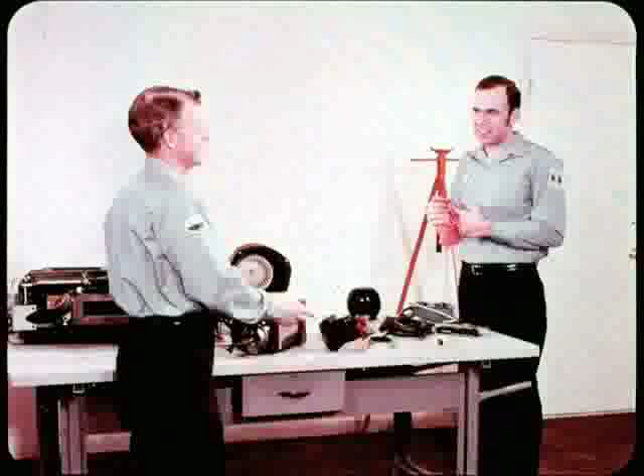Hi Phil, I see you're getting ready for the tech meeting on the new Auto Temp system. I hear it really performs. That's right, Jack. It's a second-generation system that maintains very precise control and is exceptionally stable in operation.

What's it like for servicing? Lots of new things to learn? Not really. The previous one-piece control unit is replaced by a new servo assembly in the engine compartment and a separate amplifier inside the car. Also, a couple of units are eliminated. Most of the other parts work about the same as in the previous automatic system.

Well, that sounds encouraging. What's the story on the servo assembly? Well, for one thing, it's powered by an electric motor drive, which is designed to move the servo blower and vacuum switches slowly. This slow movement stabilizes the operation of the system by preventing abrupt changes in system output.

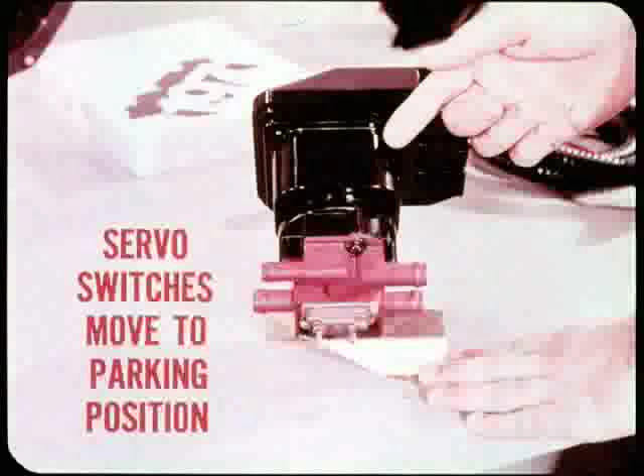In addition, the blower and vacuum switches in the servo automatically move to a parking position when the off button is pushed or the ignition is switched off. With this arrangement, the blower starts at a low speed to prevent an unwanted blast of air from the outlets. And the amplifier controls the servo.

This sounds like a discussion that should be real interesting to all of our master technicians. Why don't you start over and give Auto Temp 2 the full treatment from the beginning? Okay, Jack, but stay around. We'll probably need some help.

I understand that the heating, cooling, and air distribution sections of this system are practically the same as those used in our manual control air conditioning installation. Correct. And that means that anyone who understands the manual control system should have no trouble with those parts of the Auto Temp 2. Now let's see how the systems differ.

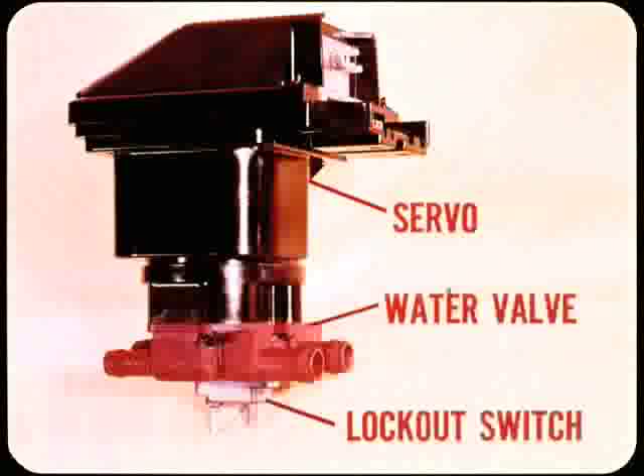In the heater section, flow through the core is controlled by a water valve, but the valve in Auto Temp 2 is operated by the servo. A new cold engine lockout switch on the water valve keeps the blower from operating in the heat mode until the engine coolant temperature reaches 125.

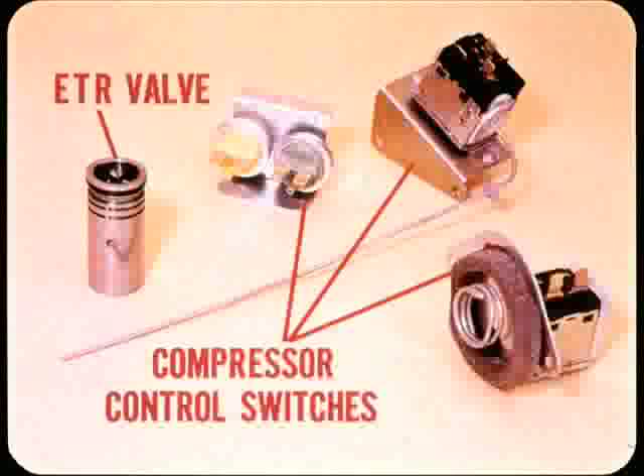The main difference in the refrigeration section is at the compressor, which has a solenoid-operated evaporator temperature regulator valve instead of the pressure-operated EPR valve. There are also 3 compressor control switches, which I'll cover later on.

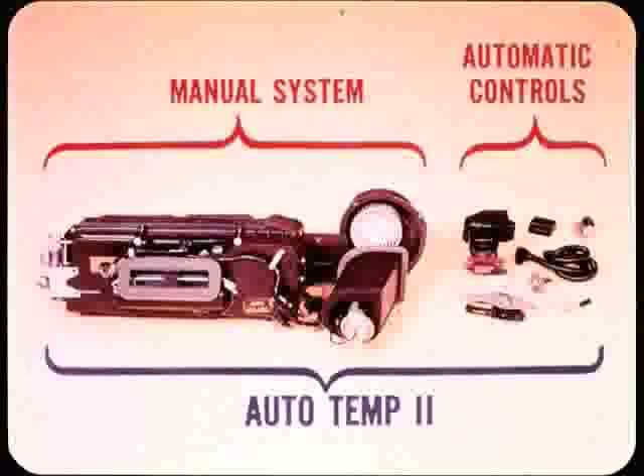As in the manual system, 2 vacuum actuators operate the heating, cooling, and defrosting doors. The separate air inlet assembly is also similar, except that the outside air door is controlled by a vacuum transfer switch. The main thing to understand at this point is that Auto Temp 2 is essentially our manual control air conditioning system with automatic controls added to keep output at a selected comfort level.

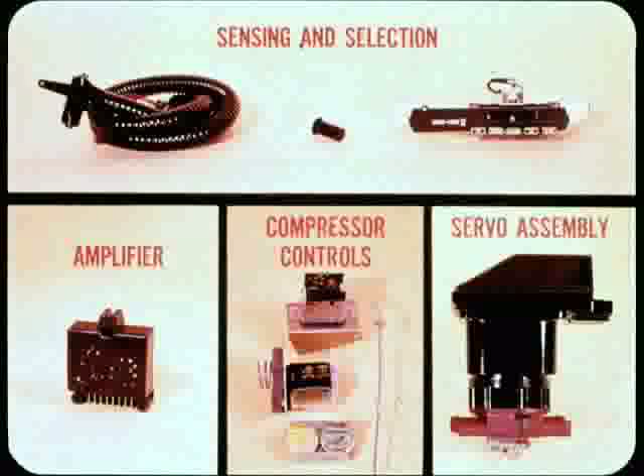Now tell us about the controls, Phil. For easier explanation, we can separate the automatic control system into 4 main sections: temperature sensing and selection, the amplifier, the compressor controls, and the servo assembly.

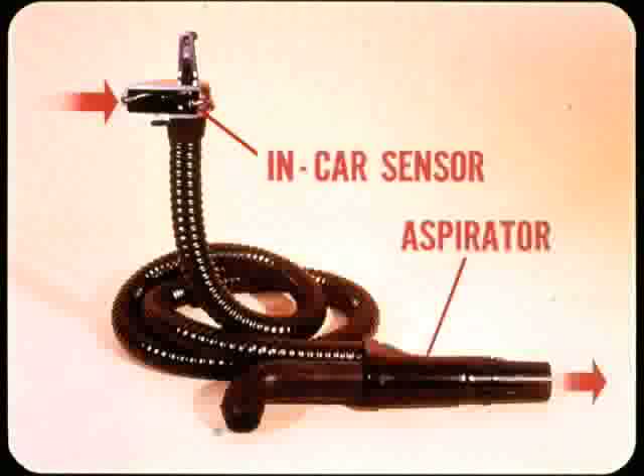The in-car sensor is affected by air temperature inside the car. It is located under a grill in the instrument panel where it is exposed to air drawn past it by the aspirator. The ambient sensor samples the temperature of the outside air.

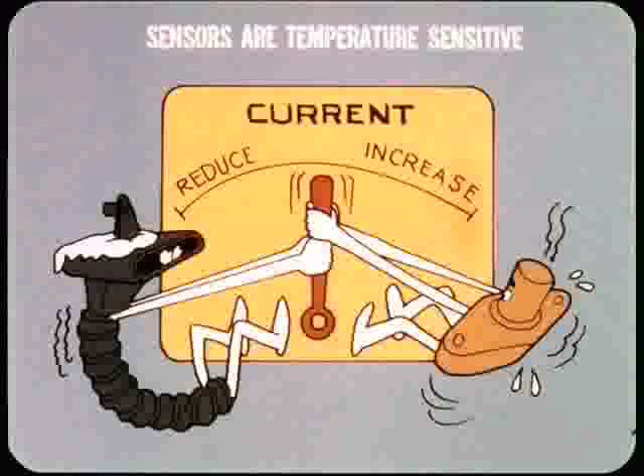It is mounted on the inside of the dash behind the glove compartment and extends into the air inlet chamber in the cowl area. Both sensors are temperature-sensitive resistance devices which reduce electrical current flow when they are cooled and increase the flow when they are warmed. Their resistance is high when the temperature is low and low when the temperature is high.

The temperature selector dial operates a variable resistance called a potentiometer, which works with the sensors and provides a manual setting for the desired comfort level in the car. When the temperature dial is moved toward the high side, the resistance increases. Toward the low side, resistance drops.

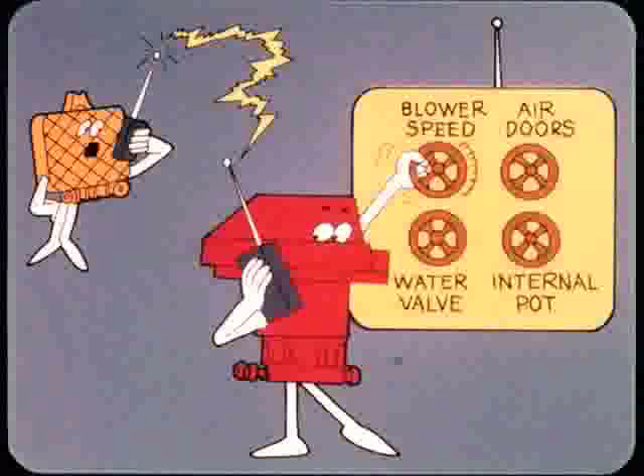The in-car sensor, ambient sensor, and control potentiometer are all connected in series. A resistance change anywhere along this line alters the current flow to the amplifier. When this happens, the amplifier signals the servo to vary the blower speed and, if necessary, to change the position of the air distribution doors and the water valve to provide and maintain the selected comfort level inside the car.

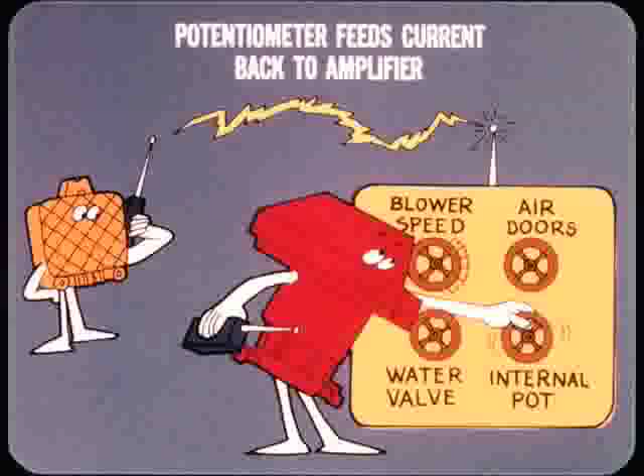As the servo operates, it turns an internal potentiometer which feeds current back to the amplifier. When the servo switches reach the position called for by the amplifier, the feedback cancels the input signals and the servo stops. How am I doing, Tech? Real good, Phil.

Why don't you backtrack and tell us some more about the amplifier? Okay, Tech. The amplifier is a solid-state computer device which combines the signals from the sensors and other system controls to direct the operation of the servo assembly. It is serviced by replacing the unit.

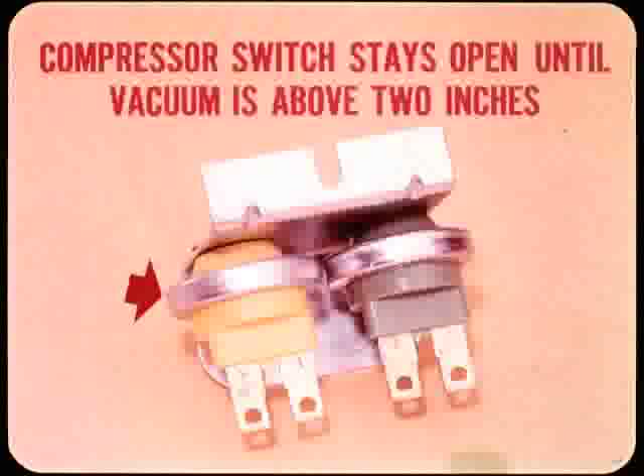You haven't said much about the compressor switch and the other compressor controls. Okay, Jack. First, we have the yellow-colored compressor switch, which stays open until system vacuum is above 2 inches. This prevents compressor clutch engagement when the off button is pushed in. I'll get to the green-colored blower switch farther on.

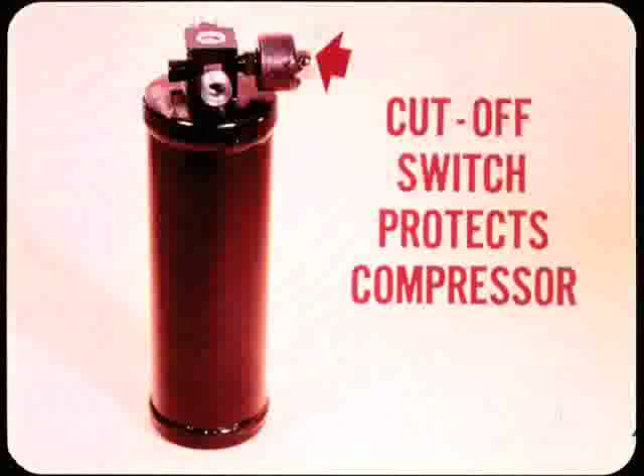Next, we have the compressor ambient switch, which has a capillary tube extending into the air distribution housing to sample outside air temperature. The ambient switch contacts open and prevent compressor clutch engagement when the outside temperature is below 32 degrees. Don't forget the low-pressure cutoff switch that protects the compressor if the refrigerant level in the system drops too low. This safety switch is the same as the one used in the manual control system.

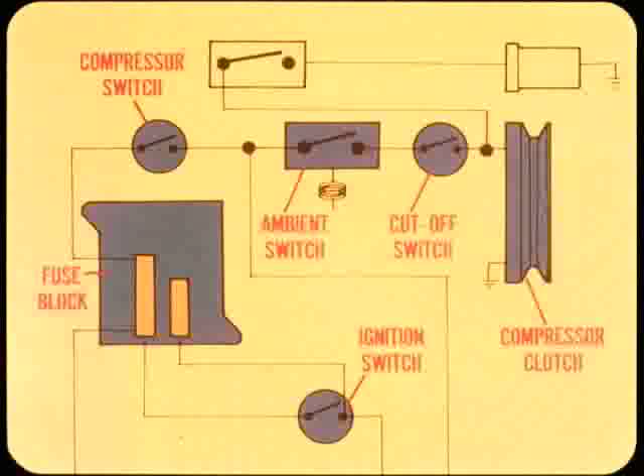Now, since all these switches are connected in series with the compressor clutch, the clutch does not engage when any or all of the switches are open. The clutch circuit is fed from the ignition switch through a 20-amp accessory fuse on the fuse block. The ETR switch is the final control unit in the compressor circuit.

This is a temperature-sensitive switch with a capillary tube that extends into the evaporator fins. When evaporator temperature goes below 38 degrees, the switch causes the ETR valve to block refrigerant flow, so the evaporator will not freeze up. When you check out the compressor circuit, you'll notice that all the other switches control current to the compressor clutch and the ETR switch. But this switch controls current only to the ETR valve.

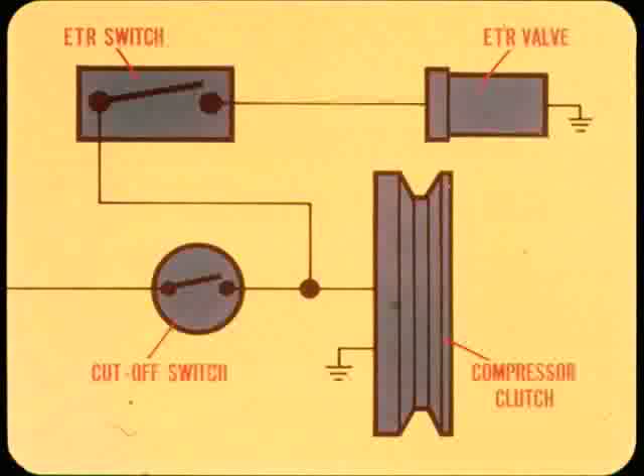This wraps up compressor controls and brings us back to the servo. We've already covered servo operation in general, so now we're ready for the servo blower switch and the blower circuit. But before we get into that, mark this down in big letters: do not tamper with the servo. The cold engine lockout switch can be replaced, but the upper section is off limits.

Okay, Phil, you're on. The servo blower switch is a limited rotation device with a switch arm driven by a two-way electric motor. The arm has an outer slider which contacts the blower switch segments. An inner slider maintains continuous contact, so the parking circuit can operate from any switch position.

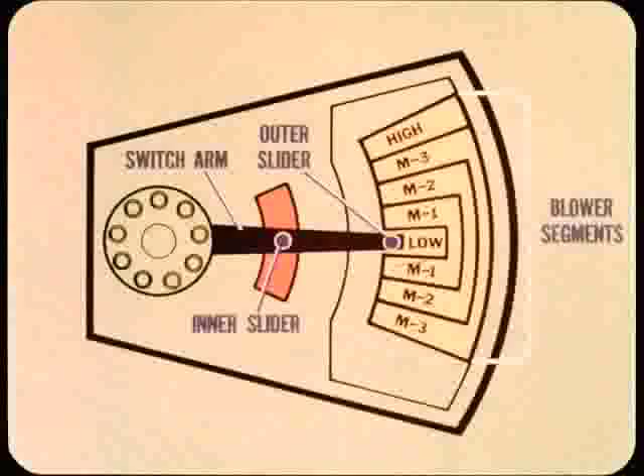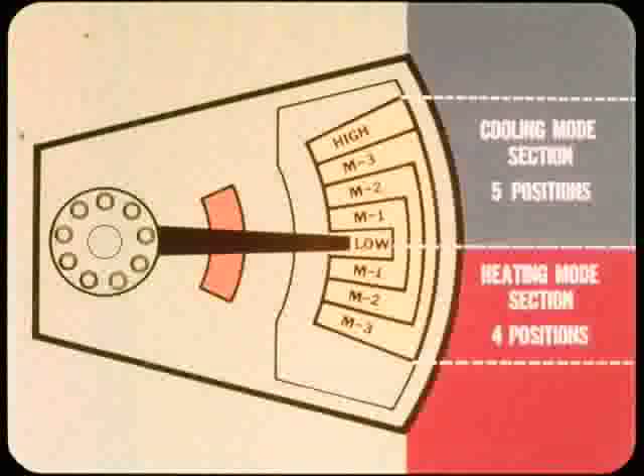The switch segments provide 5 speed positions in the cooling mode section: high, 3 intermediates, and low. In the heating mode section, there are 4 speed positions, which produce the same intermediate and low speeds used for the cooling mode. The blower switch segments connect to resistor coils on a block in the air distribution housing.

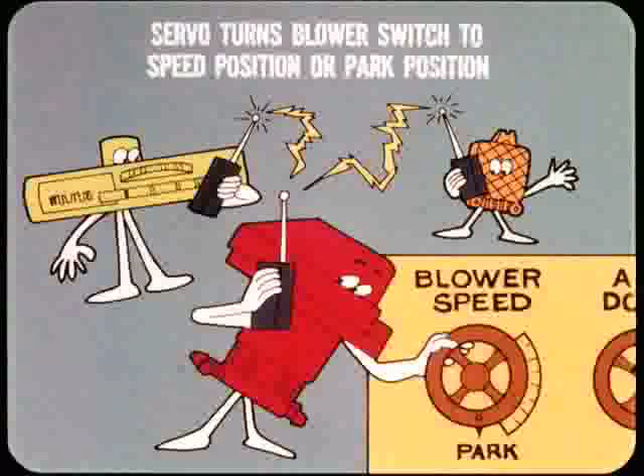The switch connects the resistors in series step by step to produce intermediate speeds. When the highest speed segment in the cooling section is contacted, the step resistors are bypassed to produce maximum blower speed. Now, depending on the push-button control setting and the amplifier signal, the servo turns the blower switch to one of the speed positions on the cooling or heating sections of the switch, or it moves the switch to the park position.

Now, I'm with you on the blower speed switching, but I need more on that park operation. Well, as I mentioned earlier, the servo parks when either the push-button control or the ignition switch is in the off position. The servo can park after the ignition is off because the amplifier has a separate fuse-protected parking feed, direct from the main fuse block.

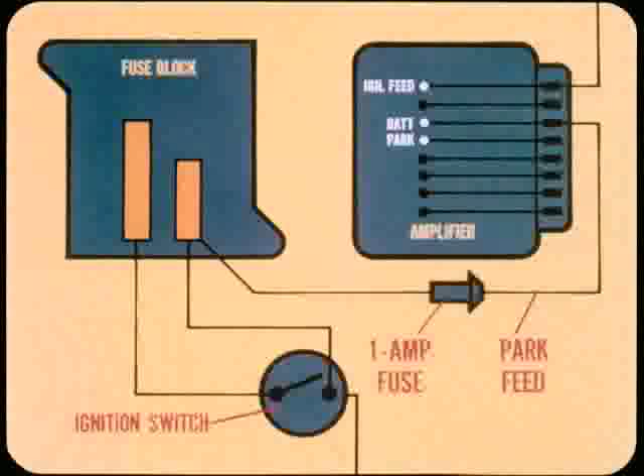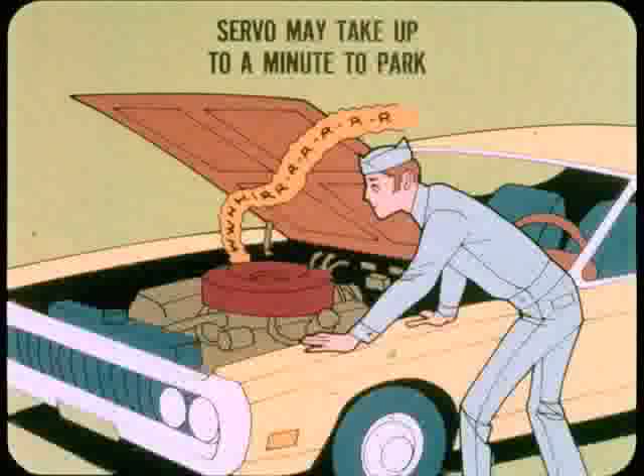You see, when all the other signals to the amplifier are shut off, only the parking feed remains. When this happens, the amplifier signals the servo, which moves to the park position and then shuts off. The servo switch arm parks on the cooling section's low intermediate speed segment. The servo switch moves slowly and may take up to a minute to reach the park position. So don't get worried if you hear the servo motor turning after you shut off the ignition.

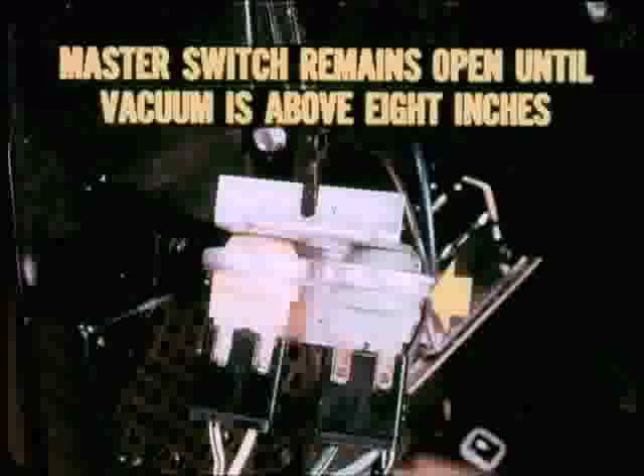Now, the blower circuit also includes the green-colored blower master switch. This switch remains open until system vacuum is above 8 inches and prevents blower operation when the off button is pushed. Okay, Phil, take a breather.

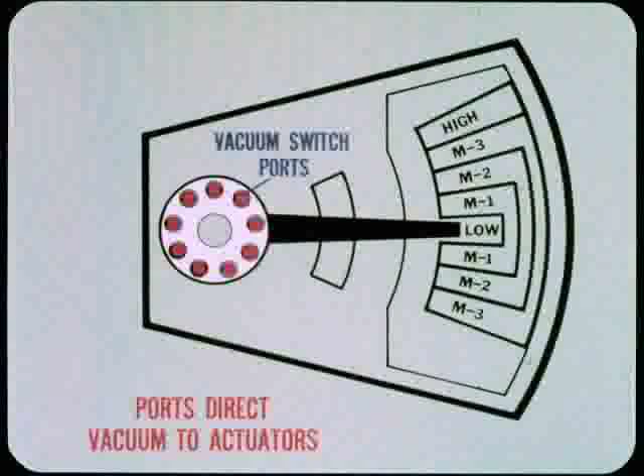The vacuum transfer switch is actually a sliding spool valve, which controls the open positions of the air inlet door, locking the door fully open or 20% open as called for by the amplifier. To hold the door closed, push-button control vacuum bypasses the switch and goes directly to the actuator.

The transfer switch has 3 ports, which are opened or closed by a sliding spool made of pliable material. An internal balancing spring holds the spool stem against the air inlet door so it can follow door movement.

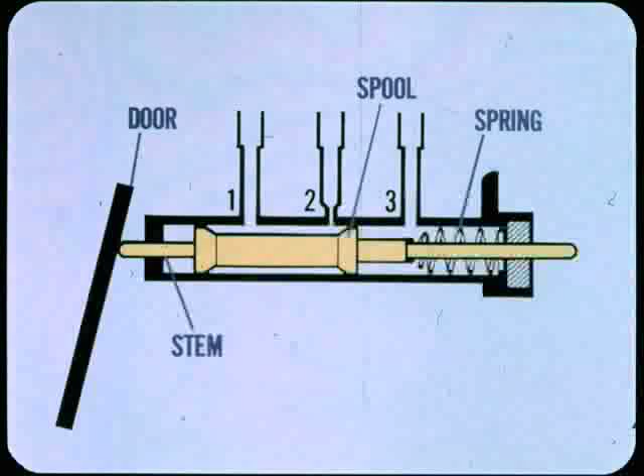Here's how it all works. Since the transfer switch is bypassed by direct vacuum routing when the air door is closed, there is no vacuum at any of the 3 transfer switch ports. The closed air door holds the transfer switch stem in and leaves the spool lips clear of the ports.

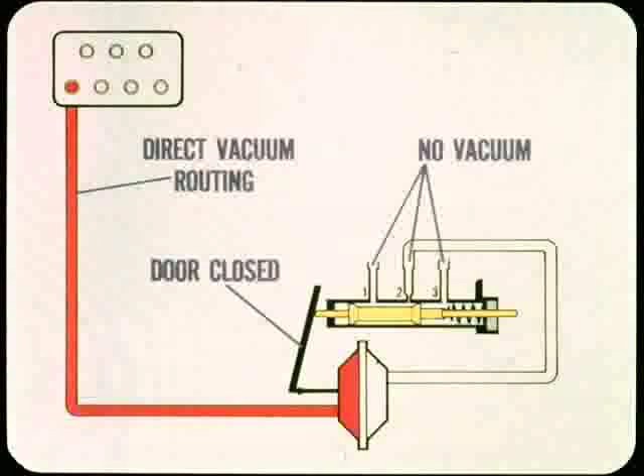In any operating mode, when vacuum from the servo switch is routed to port number 1 of the transfer switch, it acts on the closed side of the inlet door actuator through port number 2, so the door starts to open. As the air door opens, the spool follows the door until its inner lip closes the number 2 switch port. This sealing action stops door movement and traps vacuum in the actuator line to lock the door in the 20% open position.

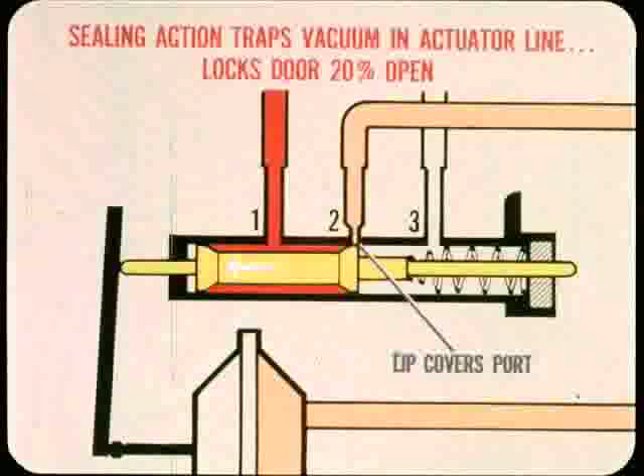When the amplifier signals for more outside air, servo switch vacuum is routed to the transfer switch. Servo vacuum is stronger than that trapped in the actuator line, so it breaks the lip seal at port number 2 and draws on the actuator to move the air door farther open.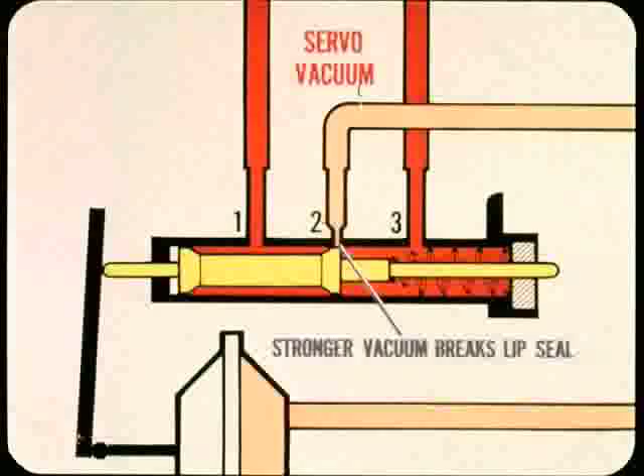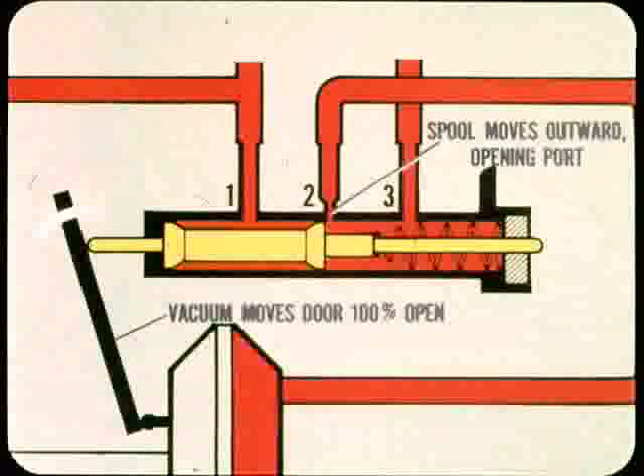As the actuator opens the air door from the 20% position, the transfer switch spool moves farther outward, fully opening the number 2 port to servo switch vacuum. This moves the air door 100% open and locks it in that position until the amplifier calls for a change.

As far as I can see, that just about covers everything in the vacuum system but the check valves and the vacuum reservoir. The check valves seal off sections of the vacuum circuits so the air doors and vacuum-operated switches can operate properly. The reservoir holds vacuum in the system for a period of time if the engine stalls or is shut off.

Don't forget to tell us how the cold engine lockout switch works, Phil. Okay, Tech. Well, basically, the lockout switch prevents cold air output when heat is wanted.

It is a simple bimetal strip which opens or closes a vacuum port in an airtight housing. The bimetal reacts to the temperature of coolant in the water valve. As I mentioned earlier, the lockout switch can be replaced separately without affecting the rest of the servo assembly. But if you need a new servo, replace it complete with a new lockout switch.

Okay, Phil? Now we can combine the operation of the electrical and vacuum circuits in a general roundup of what happens from the push-button end of the auto temp system. To put it all together, let's begin with a few general facts about system functions, so we'll know what to expect in normal operation.

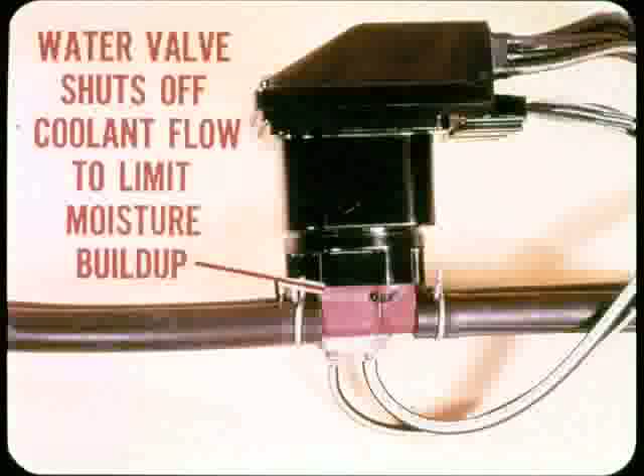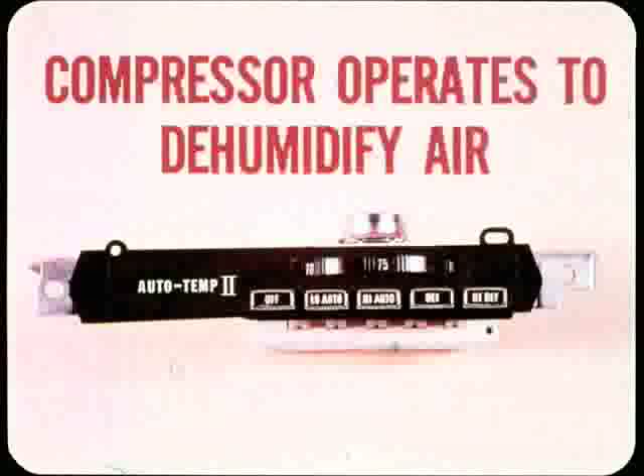When the servo parks, the water valve shuts off coolant flow through the heating core. This limits moisture buildup in the air passing through the system and into the car. In addition, the compressor operates on any push button but off, to dehumidify the air passing through the system. Of course, the ambient switch in the air housing prevents compressor operation if the outside temperature is below 32 degrees.

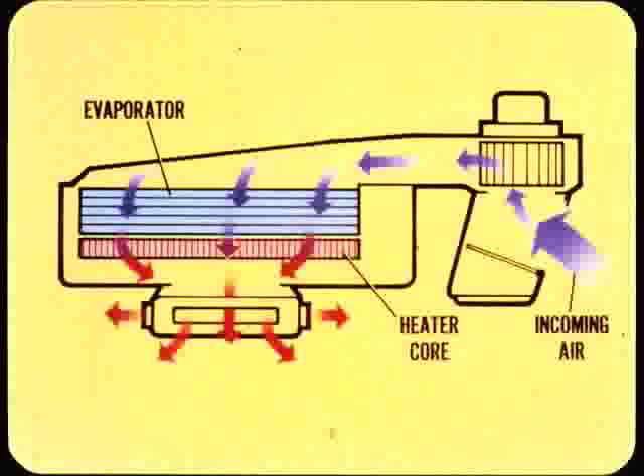So the cooling system operates even in the heating mode. That's right. The evaporator condenses excess moisture out of the incoming air before it reaches the heating core to help maintain an even comfort level in the car.

The higher blower speeds also get into the act when it's really hot and humid, especially in slow city traffic. The high air velocity keeps the car comfortable front and rear and pressurizes the car to clear out smoke.

Now, on to the push buttons, Phil. Pushing the off button parks the servo blower switch at the low intermediate speed position in the cooling section. However, the push button switch vents the vacuum lines to the master blower switch and the compressor switch, so the blower and compressor do not operate.

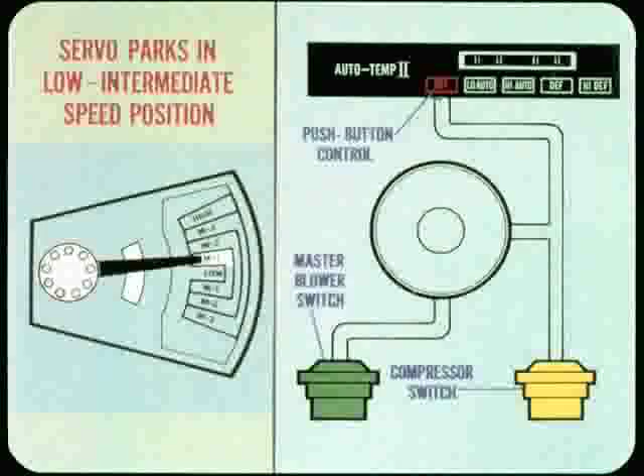On the off button, servo vacuum puts the air distribution doors in the cooling position, and spring tension holds the defroster door closed.

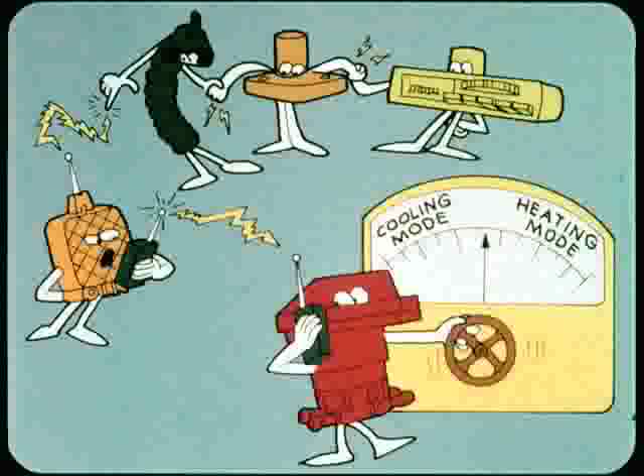Push-button vacuum goes direct to the actuator, bypassing the transfer switch to hold the air inlet door closed. With either auto button pushed in, the servo switches move to a cooling or heating mode position, depending on the signals the amplifier receives.

These signals come from the in-car sensor, the ambient sensor, and the selector dial potentiometer. In either mode, the compressor clutch engages immediately if the outside air temperature at the ambient switch is above 32. However, in the heating mode, the cold engine lockout switch delays blower operation until coolant temperature reaches 125.

On low auto in the cooling mode, the servo blower switch arm moves to one of the 5 cooling section speed segments, as directed by the amplifier. High auto bypasses the 2 lower speeds and increases the upper 3 slightly above the top blower speeds in low auto.

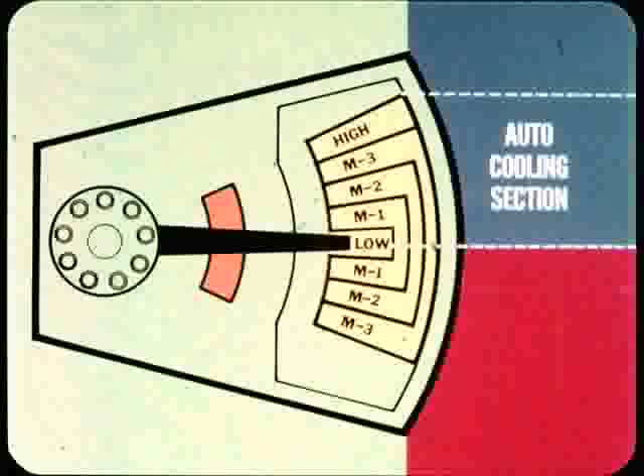On both auto settings in the cooling mode, the air distribution doors are in cooling position and the defroster door is closed, the same as when the off button is pushed. On either auto button, servo vacuum closes the master blower switch, the compressor switch, and also holds the air inlet door open.

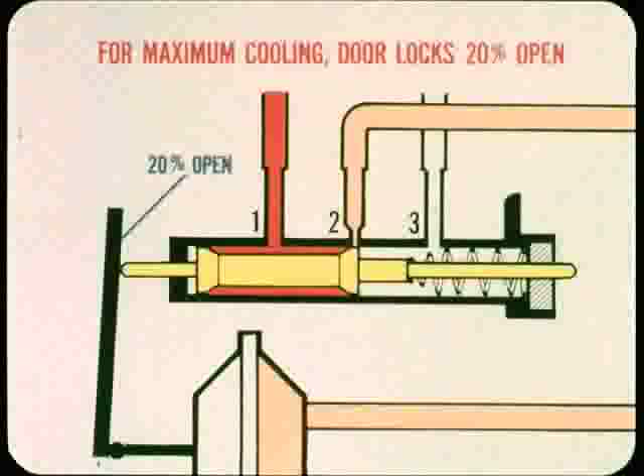Now, when the weather is hot and the amplifier calls for maximum cooling, the servo blower and vacuum switches operate mostly in their high-speed positions. This sends servo vacuum to the transfer switch, locking the inlet air door in the 20% open position. For average cooling operation, the servo switches work in their lower speed positions.

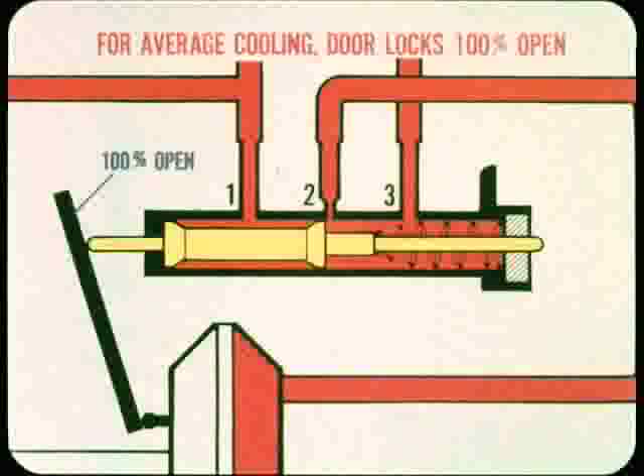This changes the servo vacuum switch port alignment and routes transfer switch vacuum so that the air inlet door locks 100% open. Now, on low auto in the heating mode, the servo blower switch arm moves to the heating section of the switch, where it contacts one of the 4 speed segments.

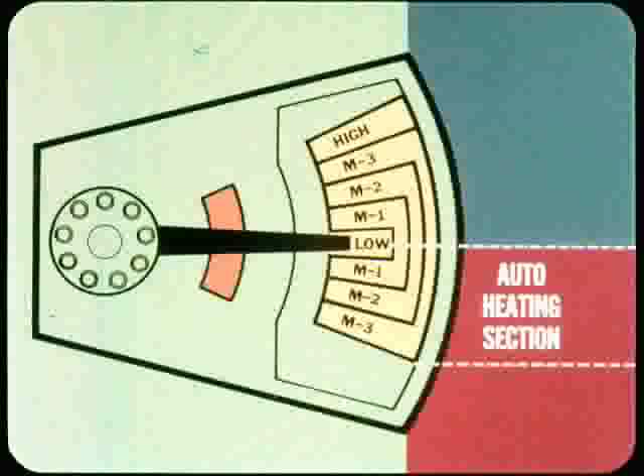High auto operation is limited to the 2 highest blower speeds, and here, as in the cooling mode, they are slightly higher than in low auto. On both auto button settings in the heating mode, servo vacuum moves the air distribution doors to the heating position, and the defroster door opens to the air bleed position.

Under system vacuum, the compressor switch closes and engages the clutch, provided that the compressor ambient switch is also closed. If the engine is cold when in the heating mode, the blower does not run because servo vacuum is blocked off from the master blower switch. Vacuum is also blocked off from the transfer switch, so the spring in the inlet door actuator holds the door closed.

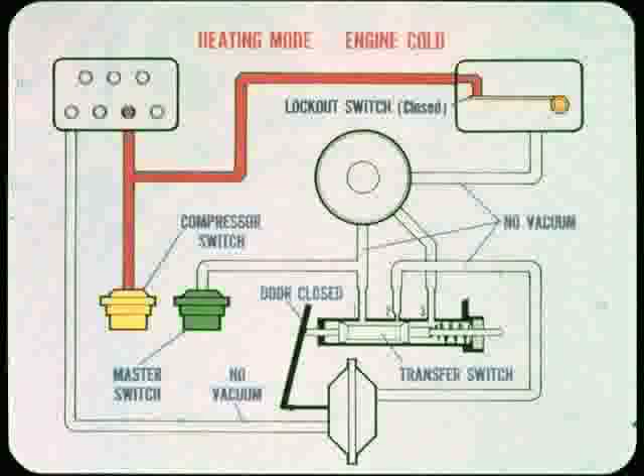As soon as engine temperature comes up to 125, the cold engine lockout switch opens and allows vacuum to go to the blower master switch and the vacuum transfer switch. The blower now operates, and the inlet air door opens as directed by the amplifier.

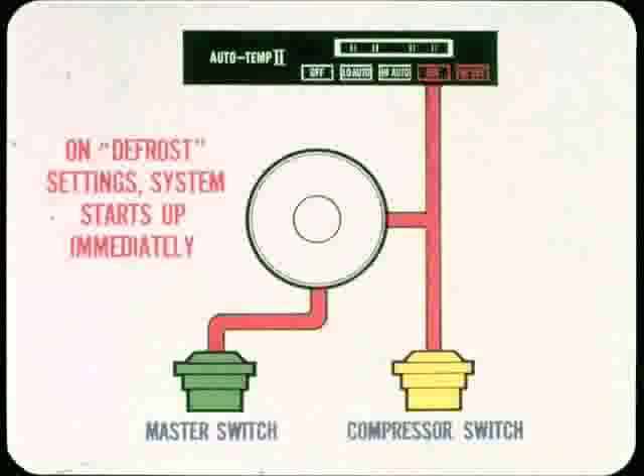Now for defrosting, on either the low or high defrost setting, control vacuum goes to the master blower switch and compressor switch to start up the system immediately. In both settings, the defroster door is open, the cooling door is closed, and the heating door is in air bleed position. The low defrost button provides essentially the same 3 cooling and 2 heating blower speeds available when on high auto.

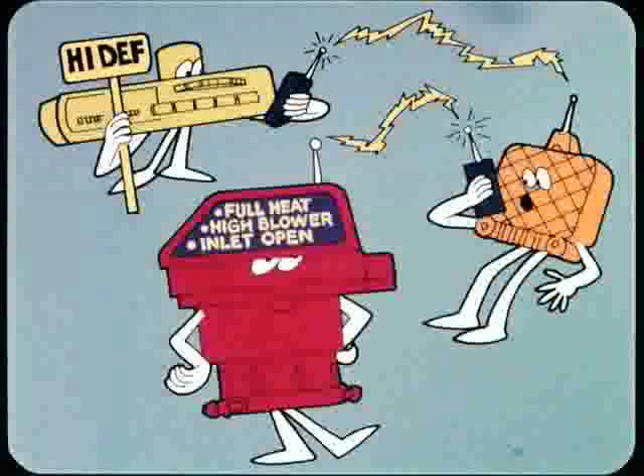As in auto control operation, the air inlet door opens 20% for high outside temperature conditions, 100% for all other conditions. When the high defrost button is pushed, the sensors and selector dial are bypassed to signal the amplifier for full heat at the highest blower speed in the heating mode position. In this control position, the air inlet door is fully open.

We're running out of time, Phil. How about a few words on the auto temp tester?

The tester is essentially a plug-in substitution device which bypasses the sensors and selector dial to control the system manually. By switching, we can check system operation completely, regardless of the surrounding temperature.

The vacuum test gauge samples vacuum at the blower master switch to indicate transfer valve and mode shift changes. The voltmeter is used to check the amplifier and servo, the sensors, and the selector dial. This new tester can be used only on Auto Temp 2 systems.

Okay, Tech, did I finish on time? Yep, you made it on time, but not quite to the finish.

There's still more to be told about Auto Temp 2, so we'll have to tell it in the reference book for this session. Whether Auto Temp 2 is in your lineup or not, every up-to-date master technician should want to know what makes it tick. You'll find the complete servicing story in the service manual coverage of the system.